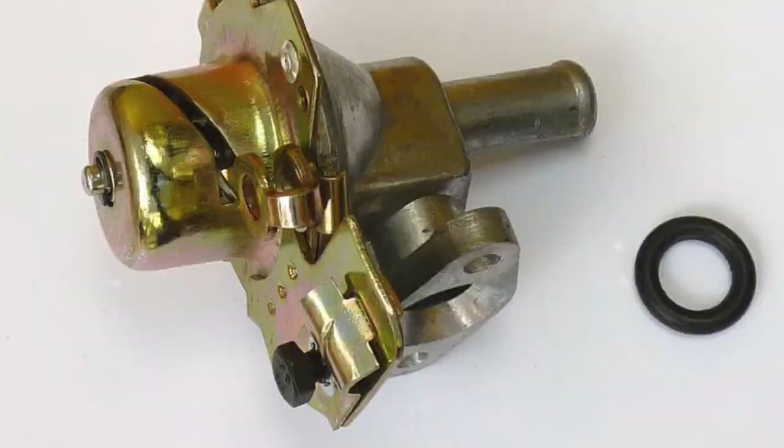So the heater valve that goes here - here's a picture of what that heater valve looks like. I just cut those pieces out of brass, here's a quick look at those pieces. So there's the main body turned off the lathe, and I cut a piece like that, another piece like that, a piece there, and that. So those are all of the parts that will make up this heater valve.

So we'll put these pieces together. This one will go on like that, then this one - so those two pieces are on. And then I'll just have to clamp that piece on like that, and that piece on like that. I'll get that clamped up, put some solder on it, and show you what it looks like.

And so here is the finished assembly. This is just heat shrink - I put that on a piece of solder and shrunk that down. I bent the solder first, put the heat shrink on it, and shrunk it down. That'll just get CA'd there.

And then that will get mounted right there. I still need to drill the hole for that hose to go through, but that gets mounted there. After that is mounted, I will then drill a hole in the firewall for the cable to come through, put a little lever on there, and connect the cable to the lever. And that is the heater valve all done.

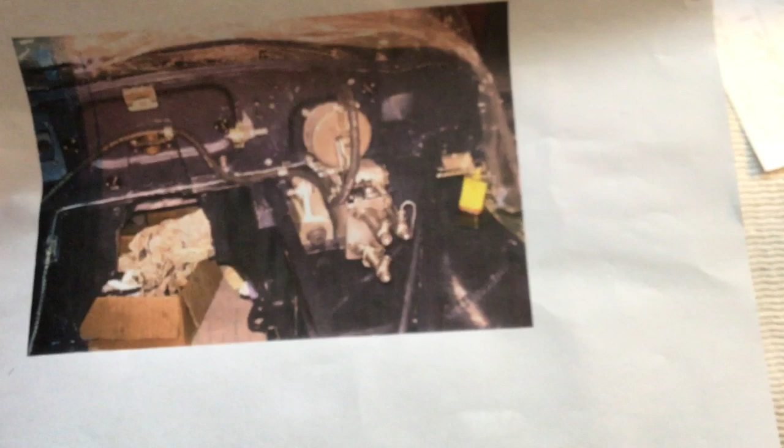And in this case, that was this shape right here. Now, the kit did not include that, so I've just been going off of reference photos. Here's one of the photos I was using, and that is this piece right here. I got a photo of this view, and another photo looking down from the top so I could get an idea of the overall shape. Again, just filed that out of a piece of aluminum.

And the rod here for the throttle linkage, that's a piece of brass. I just cut and drilled that, filed it to shape, filed the edges smooth, and then put it in the liquid tin. I've used this stuff before and I really like it, but you really have to clean the brass - got to make sure it's super clean, or this stuff won't work very well. Takes a little practice to figure that out. Not too bad, but that's just coated in the liquid tin.

And I did drill that hole all the way through because it'll go through here and connect to the steering wheel. I might make the steering functional - not really sure just yet. But there's your steering and throttle box. On the real car, your gas pedal goes up through there and runs that arm for your throttle, but obviously that's not going to work on this thing.

So again, that goes there. And the other part, if we go back to the reference photos, all of this stuff right here - these are your brake, your front and rear brake master cylinders, your clutch master cylinder, and then your pneumatic servo for your brake assist.

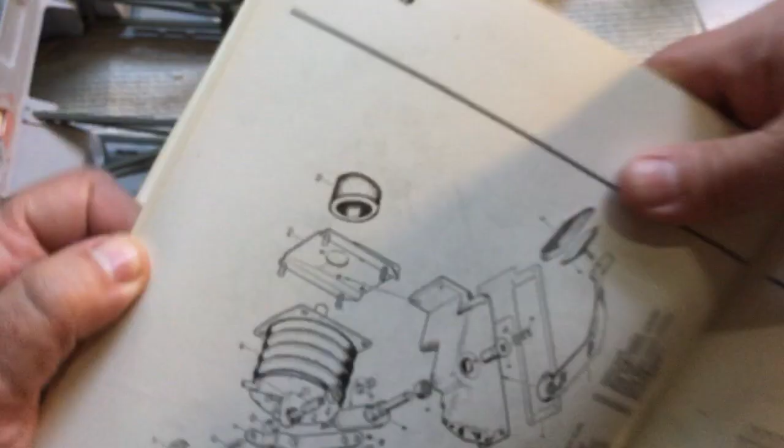One thing that really helped with building that, along with the reference photos - I think I showed you this before - I got a shop manual on eBay, and in the shop manual there's a section here for the brakes. So by looking at the reference photos and this exploded view and the kit part, this is what the kit gives you - not even a clutch cylinder, just the brake cylinders, and that's it.

I went through the same process that I did for the throttle and steering box, starting with this piece right here, and just cut that out of a piece of aluminum, like I did for the other one. It took a few tries - my first two attempts didn't come out very well at all. I scrapped them and started over a couple of times.

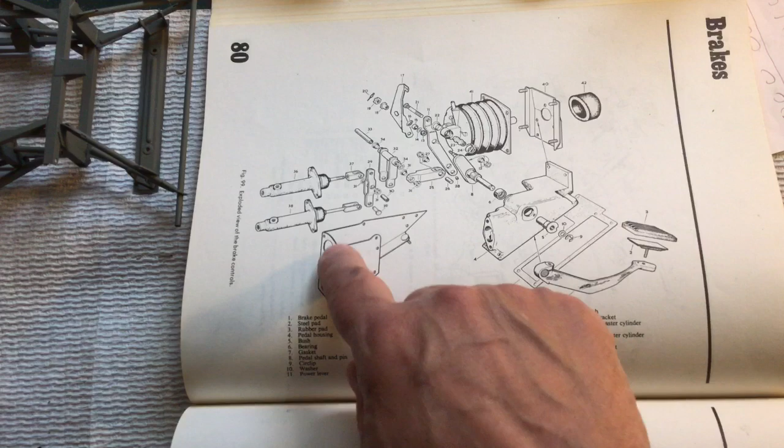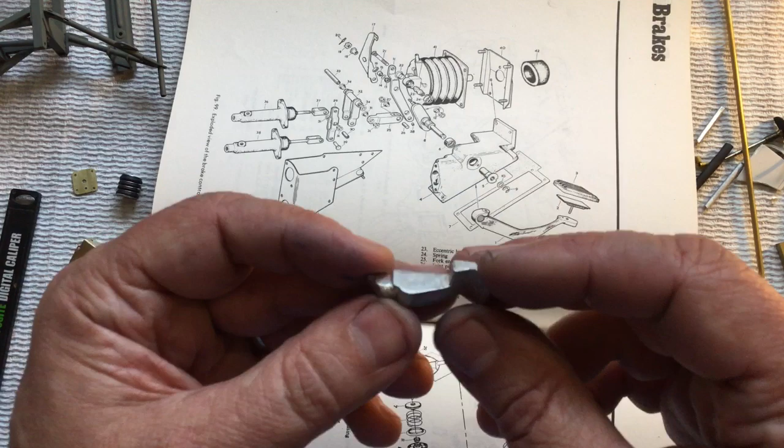After I made that, then I made the bracket here out of brass, then I made this piece here. Let's take a look at some of those parts. This is that piece right here - there's that piece pretty much done. It still needs a little more smoothing, sanding and polishing, but I'm going to call it done for now.

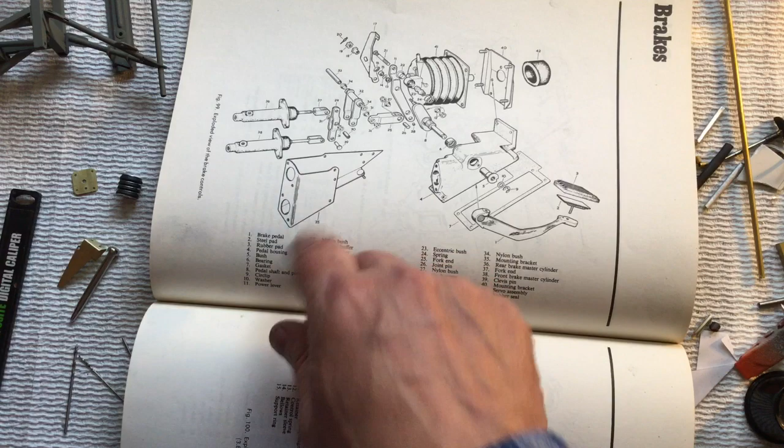Next part I did was this bracket around here. I just cut out a paper template, transferred that to a piece of brass, and that then goes just like that. I have the holes here for the front and rear brake cylinders that go here. So that is that piece, just like that. I will more than likely just JB weld that in place - we'll see.

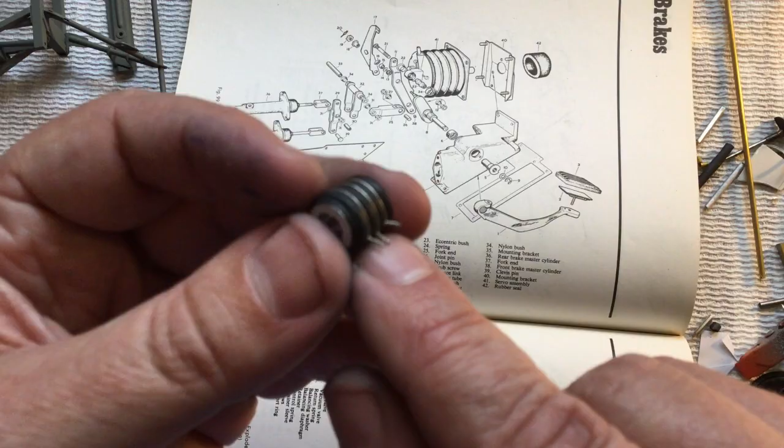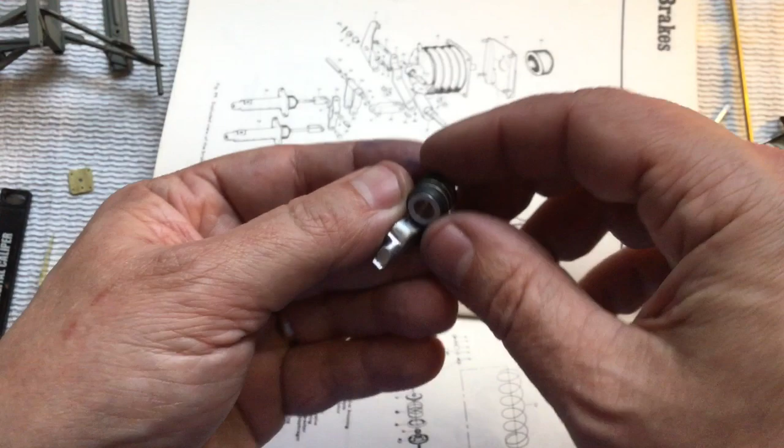Next thing I started was the bellows part here. I turned that down on a piece of aluminum, turned in the ridges, then put a piece of heat shrink around it, and some steel wire. I'll cut those shorter just before I final attach it, probably put a little CA on it to keep them from unraveling. But those will be on the bottom, like that, so when it's all installed, those parts will never be seen. I'm not concerned about that.

Next part is the back plate here, and that's just a piece of brass, and that will go on just like that.

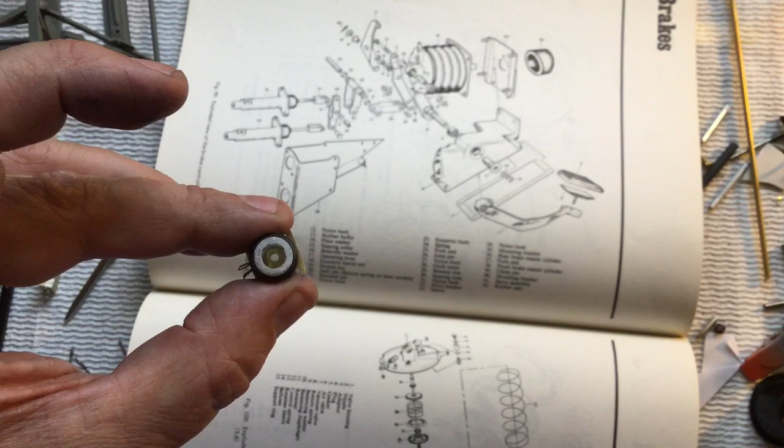I did put a hole here. What I'll more than likely do is just put a screw through that hole and fill that with JB Weld, and I'll do a similar thing for the front part there. I will more than likely liquid tin this piece, and just put some fake studs and nuts coming through those holes.

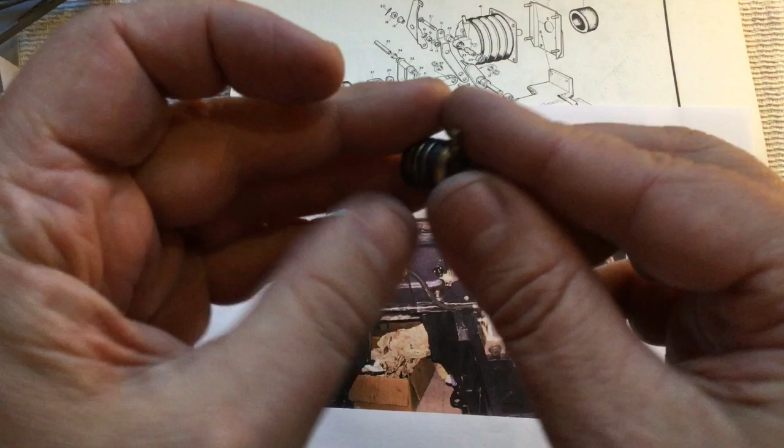There's also a hole here, and that hole lines up with the hole we saw earlier right there. So I'll probably actually screw that on, running a screw from the back side and cutting the threads off flush so that this can go on it like that. Now the front of that, right there, those are the parts soldered on, and again that will go right there.

The front and rear brake master cylinders and the clutch cylinder here, and this is the one for the clutch, and that will just go into the hole like that.

It's a little bit of a tight fit, and I don't want to break that little shaft off, so I don't want to force it just yet. I'll file that or open that hole up a little bit so it'll be a nice slide fit, and put that in with some CA or Loctite, but that'll go in like that.

Here is one of the completed brake cylinders, and there's the back side, and that will go on just like that.

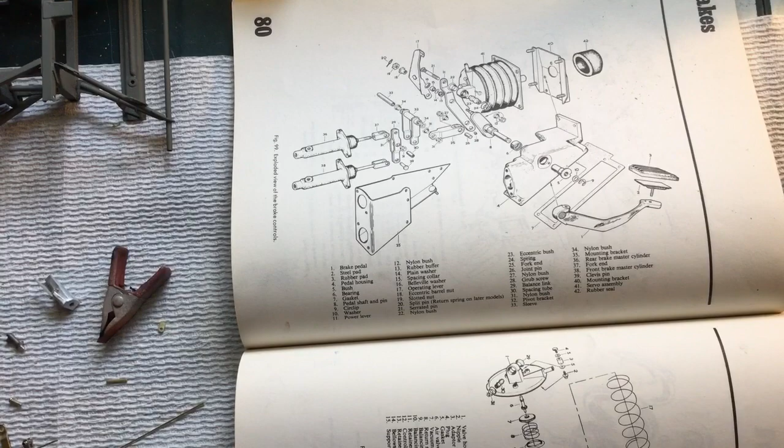So I've been making these little pieces in here. Those are the pistons for the master cylinders, and nothing here is really glued together yet, but that shaft and those two arms are there. Again, I've been looking at reference photos, and the exact shape of all these pieces isn't technically correct, but everything is connected to the correct other thing.

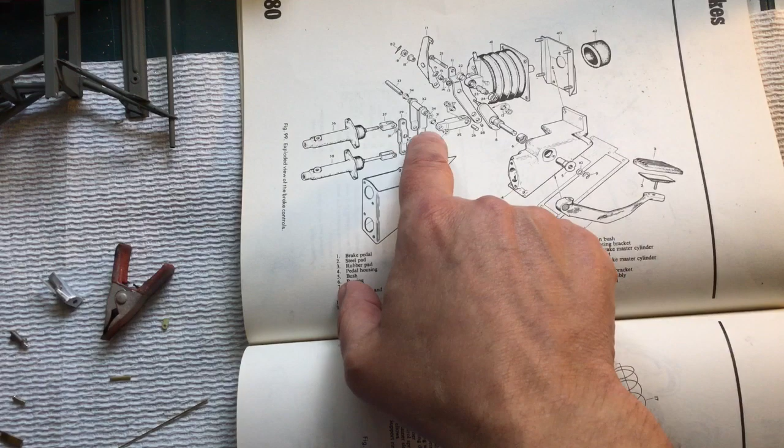I did make a few changes. For example, this piece right here connects those two pistons, and that piece goes in between them. What I did was make that flat, and made that piece go around it. That was just easier to make, and especially for something that won't even be visible when it's together, I'm okay with that. So that's what it's looking like now.

This needs a little bit more fine-tuning, polishing and cleaning up. Some of the pieces are left long, like for example, this right here is probably a little long, I'll have to cut that off. And this piece sticking back here again is probably a little bit long. I'll probably have to cut it off about here somewhere, but I'll determine that as I'm fitting it.

And that one's wanting to fall off. And this all connects to, like that. Yeah, that one came off, that's okay. And that connects to the pneumatic bellows.

And of course all of this can come apart. Take that off, take this other one off, and we'll pull that apart. So there's all of the individual pieces. I'm missing one. So those are all of the individual pieces.

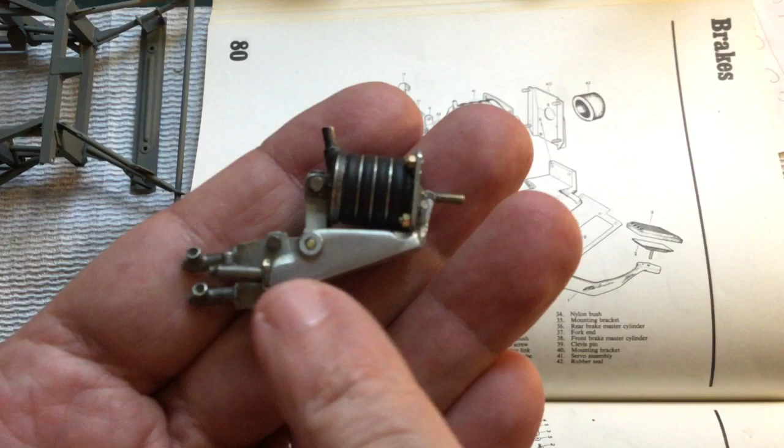And with it all assembled, here's what all of that looks like assembled. We'll just kind of go over how I made these pieces here. Again, the main base part, the bottom view here, was just cut and filed out of a piece of aluminum. And I don't like that washer.

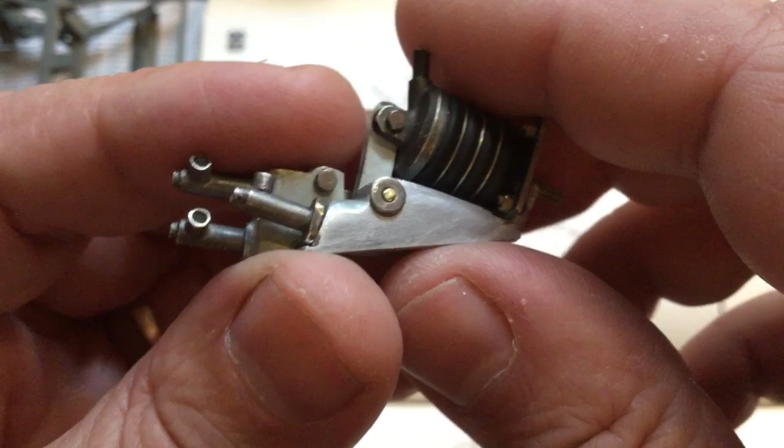If you can see, there is supposed to be something there, and in the reference photos there's something there. That's just too big, I don't like it. I'll pop that off - it's only held in with CA - and make something a little smaller to go around there. So again, this piece was just made out of aluminum.

The cylinders, the clutch and brake cylinders, were turned down out of a piece of brass, and that piece there just soldered on after the fact and then drilled through to about 35 thou.

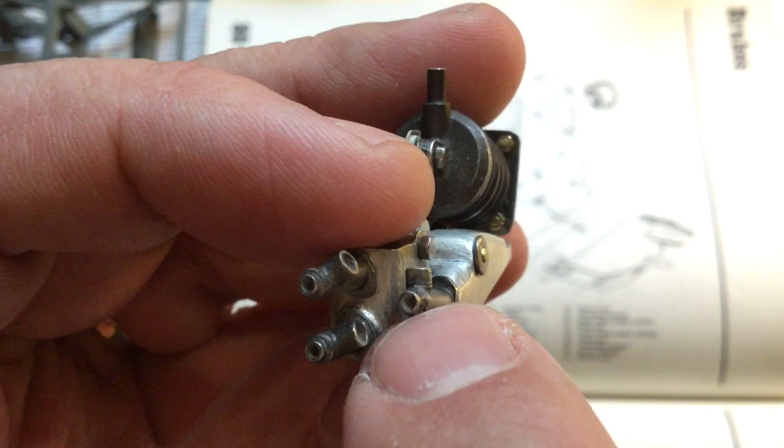32 thousandths stainless steel wire fits in there perfect. And 32 thousandths wire times 8 is pretty much 1/4 inch. Automotive brake lines are pretty much 1/4 inch, so that worked out pretty well.

And then all of the linkages inside - again, looking at the book here, it's really hard to tell what's connected to where. So this is based on reference photos that I looked at to connect everything. I'll be honest with you, those parts did not want to fit very well. That was a real pain in the rear getting that stuff together.

This bracket around here is just brass, again dipped into liquid tin. The front plate is just a turned piece of brass. That piece is soldered on, that piece soldered on, and it's just CA'd to the bellows. And then that's just glued to the back plate here. That screw has copious amounts of CA on the back. That screw goes through, and this piece is actually hollow, so the head of that screw is inside of here. The CA locks it all in place.

And that's pretty much the brake units, or the clutch and brake assembly. You'll notice there's some scuff marks here. I painted that front part, and I painted these cylinders. The color I used is burnt iron - it's actually this right here, Model Masters burnt iron is what I used, and just a really light dusting of it.